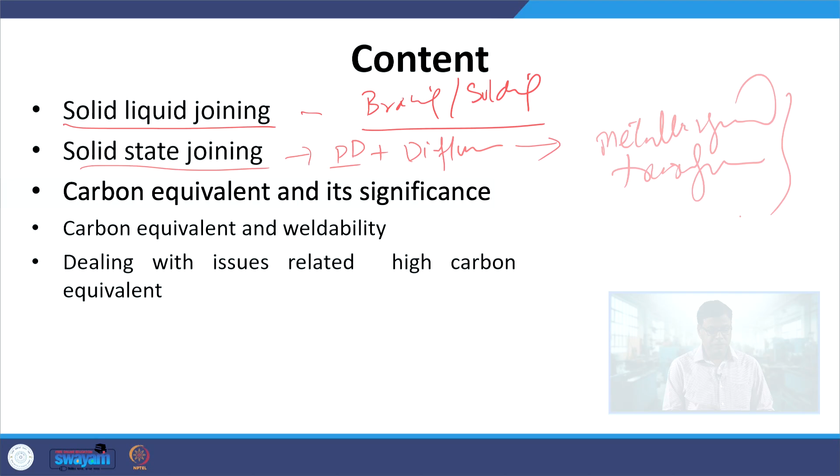In solid state joining process, primarily plastic deformation coupled with diffusion is involved, and that in turn leads to multiple kinds of metallurgical transformations. So we will be talking about the kind of metallurgical transformations which occur in the solid state joining process.

Then the carbon equivalent and its significance - this is particularly true for the welding metallurgy associated with hardenable ferrous metals. Then what are the common issues which are encountered? So, the relationship between carbon equivalent and the ease of welding the ferrous metals.

Since the carbon equivalent is related to the ferrous metals, or transformation hardenable metals like steels, you will try to see the relationship between the carbon equivalent and the weldability of the ferrous metals.

Then what happens when the carbon equivalent is very high? Many issues are encountered and that poses many challenges in development of a good weld joint with reasonably good performance. So how to deal with those issues in case of high carbon equivalent ferrous metals? What are the strategies that are available?

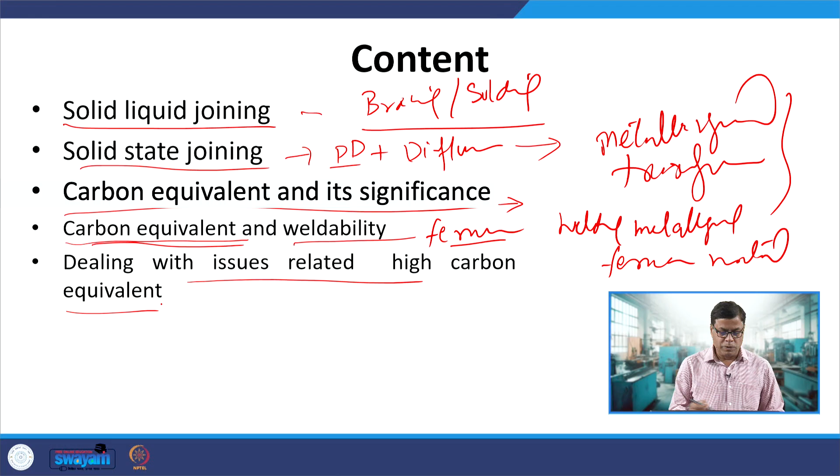Now going ahead with the solid liquid joining process, like brazing and soldering, say parent metal A and B. Initially what we do is the surfaces need to be cleaned and prepared, then heated using a suitable source of heat. This can be induction heating, flame heating, or any other kind of heating.

When things are heated, the metal surfaces interact with atmospheric gases, so they tend to form oxides, nitrides, and also impurities can be there at the surfaces. To take care of these impurities, normally flux is applied at the surface, so that it interacts with the impurities to form slag.

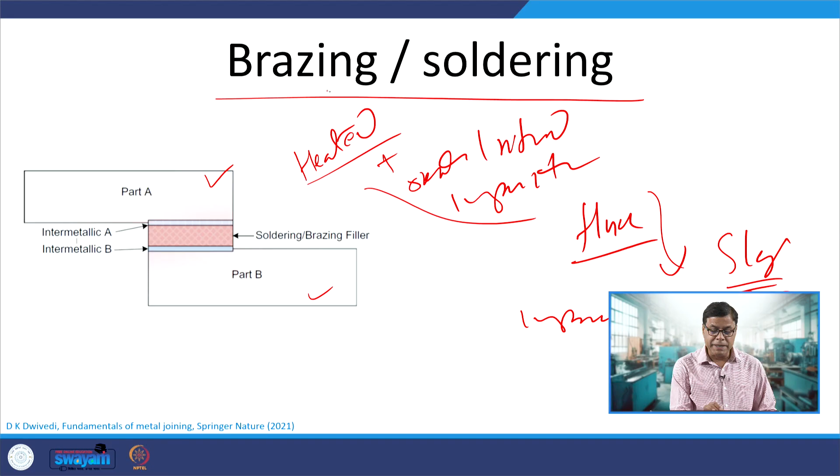Additionally, it improves the fluidity of the molten metal that is obtained by melting the brazing or soldering material. Since the brazing and soldering materials are relatively low melting point materials, when a brazed or soldered joint is developed, we get relatively low strength as compared to the parent metal, because the melting temperature is less. So strength is also lesser than the parent metals.

But if we see, say a brazed joint has been developed - another thing which is important here: this is one substrate of great thickness, and this is another substrate or parent material, and in between we have the molten brazing or soldering material. Heat is extracted very rapidly to the underlying parent metals.

So how do the liquid to solid state phase transformations occur in the brazing or soldering process? It is very simple. Initially we may get some kind of planar structure, and mostly it is the cellular grain structure which is obtained after the solidification in the brazed or soldered layer.

The second aspect is where the molten metal will be interacting with the parent metal A and B. It is possible that if the filler metal used for brazing or soldering purpose is C, then C can interact with A differently from B. There is a possibility that when C interacts with A, it forms one kind of intermetallic compound, and when C interacts with the other parent metal, it forms another kind of intermetallic compound.

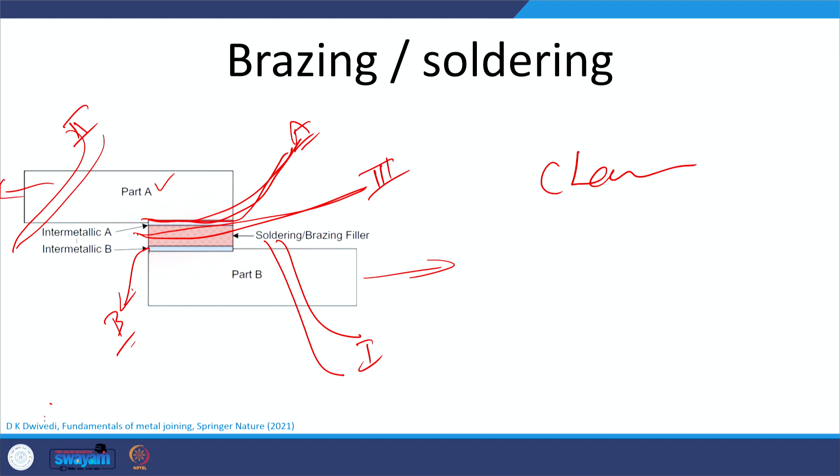So if part B is failing, it means the joint and part A both are stronger. If part A fails, it means part B is strong, but part A is weaker than the joint and part B.

And there is another possibility: if the load is applied and failure occurs from the filler metal itself, then the interface is intact on both sides - parts A and B both are intact, meaning they are stronger, and the filler is weak.

So by changing the filler, it will be possible to increase the joint strength, that is one of the aspects. And this is also possible, like if the failure occurs from the interface intermetallic A, that is the filler and part A interface.

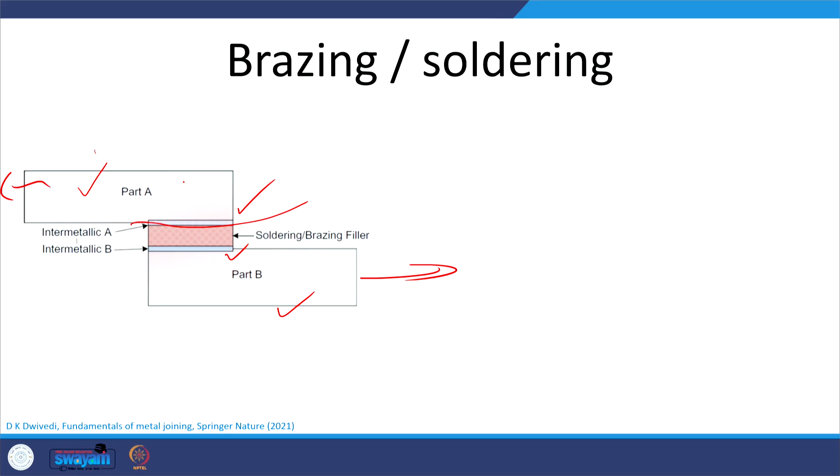If this is failing, it means this intermetallic A is weaker, or intermetallic B is weaker if it fails from the other side. This B is weaker. So that makes the problem a little difficult.

It becomes the case where we have to modify the intermetallic A or modify intermetallic B in such a way that it has more favorable characteristics, and most of the time what we get is hard and brittle intermetallic compounds. So if it is very hard, very brittle, then this will lower the load carrying capacity, lower the ductility of the brazed or soldered joint which is being formed.

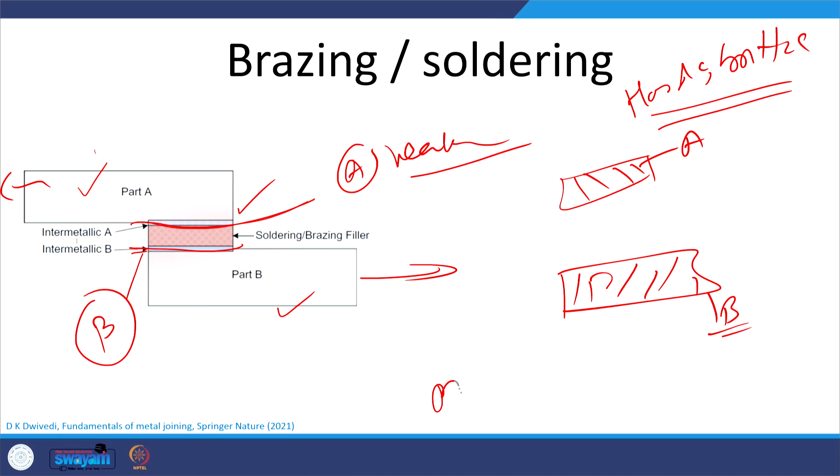So what is done in order to modify the characteristics of the intermetallic being formed on the A side or B side, we can do a lot of things. It includes post heat treatment of the joint, or it also includes modification of the composition of the IMC which is being formed. That can be done by choosing a suitable kind of filler or by incorporating certain alloying elements with the filler, which helps in developing more appropriate kinds of intermetallics wherever the failure is getting triggered.

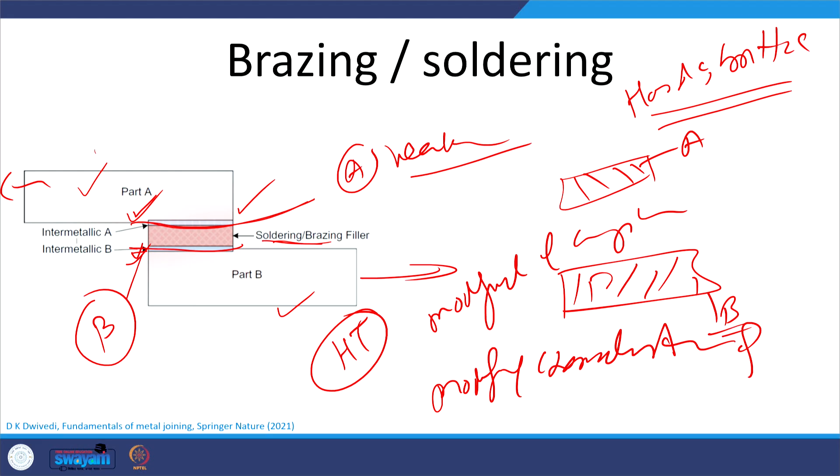Now as far as the solid state joining process is concerned, there are two broad approaches. One is plastic deformation, which can be both micro or macro level, coupled with heat generated causing recrystallization, grain growth, recovery, or deformation assisted phase transformation, apart from grain refinement due to dynamic recrystallization. This is one thing, where deformation coupled with heat causes many changes.

Another one is where just diffusion is involved. So in the diffusion bonding process, primarily at the surface we may have micro level plastic deformation, but mainly the diffusion across the interface is responsible for the development of the joint.

So if we talk of processes like friction welding, friction stir welding, forge welding, ultrasonic welding, explosive welding, or magnetic pulse welding - in these processes certainly plastic deformation is involved coupled with little heat generation. So if the metal is significantly of work hardening type, then the micro level plastic deformation at the surface leads to increased hardness.

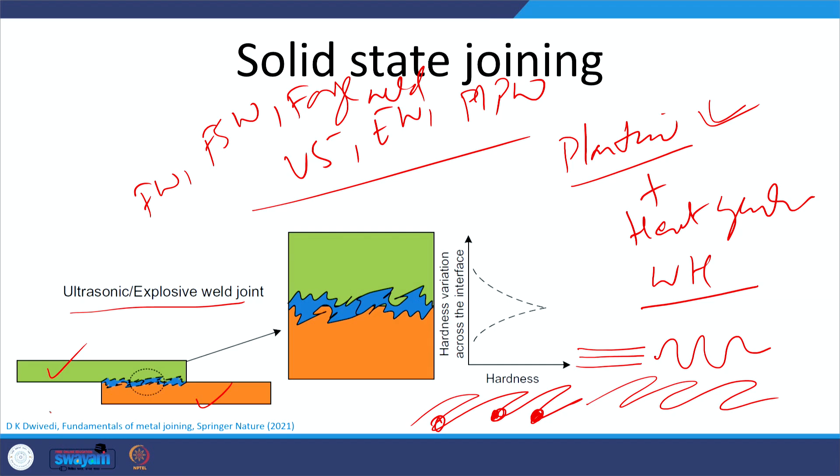But in all these cases what is common is significant plastic deformation at micro level, and when this plastic deformation occurs in the work hardening metal, there is a significant increase in hardness. This can be due to simple strain hardening, grain refinement, or plastic deformation assisted transformation. So multiple factors can be responsible for little higher hardness, because the heat generated during ultrasonic and explosive welding is very limited.

If the metal is primarily of the precipitation hardening kind, then the effects of work hardening, recovery and recrystallization will be very limited. There is no scope for formation of fresh precipitates; rather, due to heat generation, some reversion can take place, which can significantly reduce the interfacial hardness distribution. So this may be true for work hardening metals, and another behavior can be true for precipitation hardening metals.

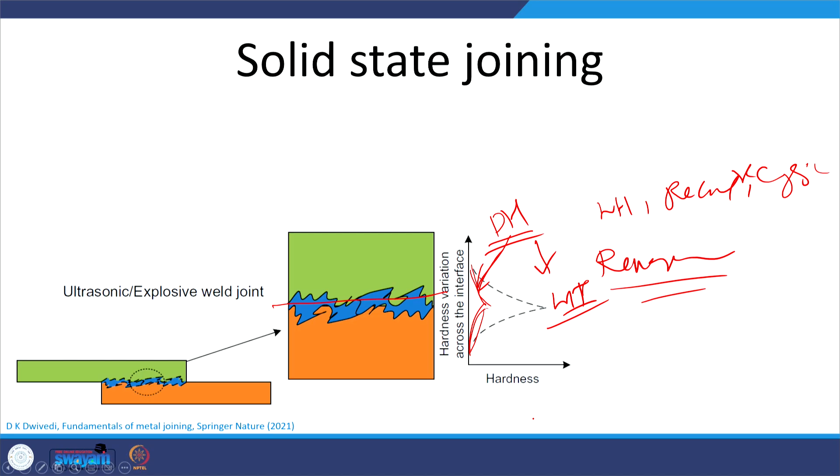Now, if we talk of solid state joining processes where significant plastic deformation is involved, like friction stir welding (FSW) of precipitation hardening metals, these metals are strengthened by the formation of fine precipitates in the matrix.

When plastic deformation is carried out, the metal is severely deformed, coupled with heat generation that is significantly high enough to cause reversion in the weld nugget area. So two things happen: severe plastic deformation coupled with heat generation causes dynamic recrystallization.

This dynamic recrystallization forms new fine recrystallized grains, from which everything as far as precipitates are concerned has been dissolved. Due to the dissolution of precipitates, some elements go into solid solution, providing solid solution strengthening, but since these are precipitation hardening metals, there will be a drop in hardness and strength. That is what we see in the weld nugget, a drop as compared to the base metal.

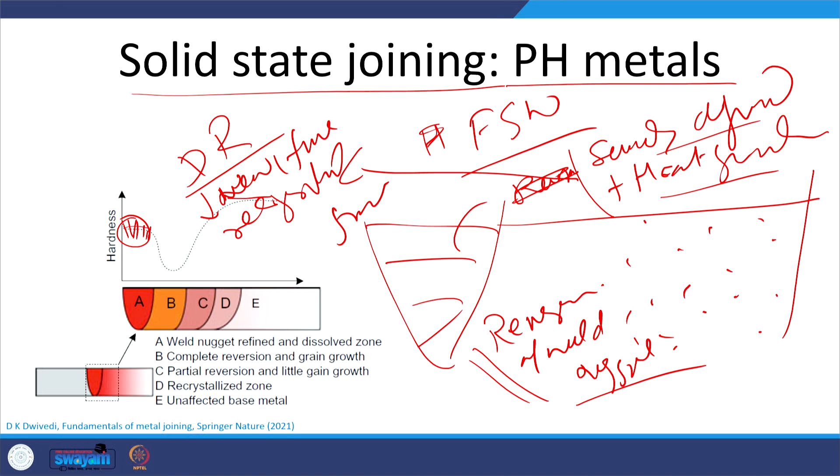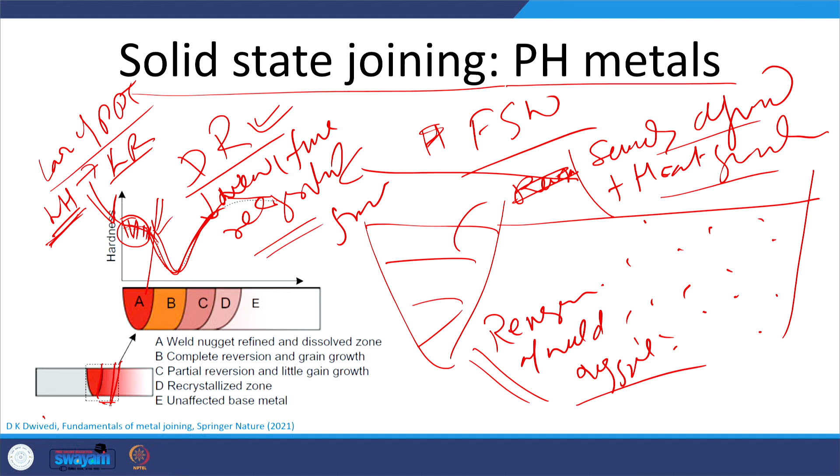At the same time, some work hardening effect can also be observed. But if we look at the zones a little away from the nugget zone, those not falling within the nugget zone itself...

In that area, significantly affected by heat, there is a severe drop in hardness, attributed to complete reversion coupled with grain growth, with no work hardening effect whatsoever. That is why even in precipitation hardening metals we get slightly higher hardness in the nugget due to grain refinement and work hardening, but in the heat-affected zone there is a significant drop due to reversion, complete loss of precipitates coupled with grain growth, and no work hardening effect. That is why the minimum hardness zone is found in the heat-affected zone of precipitation hardening metals subjected to solid state joining processes like friction stir welding.

That is why, in the nugget zone A, the weld nugget is refined due to dynamic recrystallization but is completely free from any kind of precipitate, so an all-dissolved zone is formed. Complete reversion and grain growth take place in zone B, reversion is partial with little grain growth in zone C, and recrystallized grains appear in zone D, with unaffected base metal beyond that.

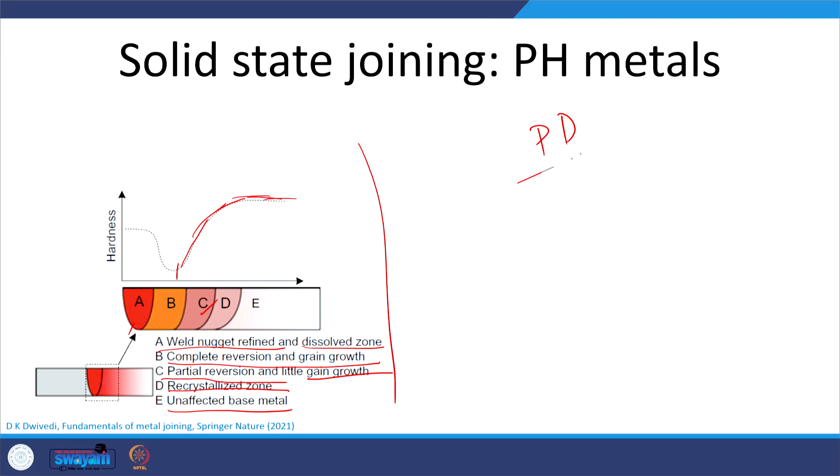So after zone B we see increasing hardness and strength. This is about precipitation hardening metals where significant plastic deformation is involved, coupled with heat generation sufficient to cause recrystallization of the metals.

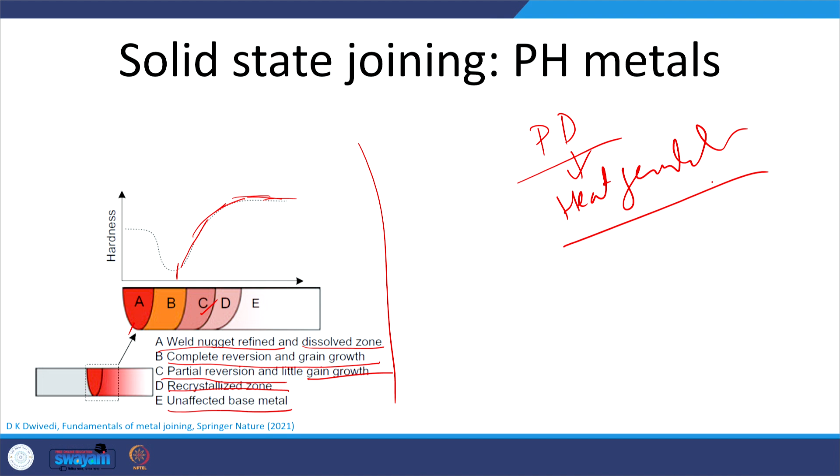If we talk of solid state joining processes associated with work hardening metals, such as ferrous steels, they also show reasonably good work hardening characteristics coupled with transformation hardening. So solid state joining like FSW of ferrous metals causes significant work hardening of the weld nugget area coupled with transformation-assisted hardening, because initially we may have ferrite and pearlite at room temperature, but the weld thermal cycle imposed during welding usually leads to the formation of martensite coupled with some pearlite, and therefore we get significantly higher hardness in the weld nugget area of ferrous metals.

The same is also true for WH metals, since these metals rely heavily on work hardening, and since the weld nugget area is subjected to severe plastic deformation, this zone will show a significant increase in hardness and yield strength. That is why we get significantly higher hardness of the weld nugget area.

Away from that, whatever zone is formed, since work hardening metals are strengthened by development of dislocations, these metals undergo controlled plastic deformation to realize high dislocation density, so that yield strength and hardness can be enhanced.

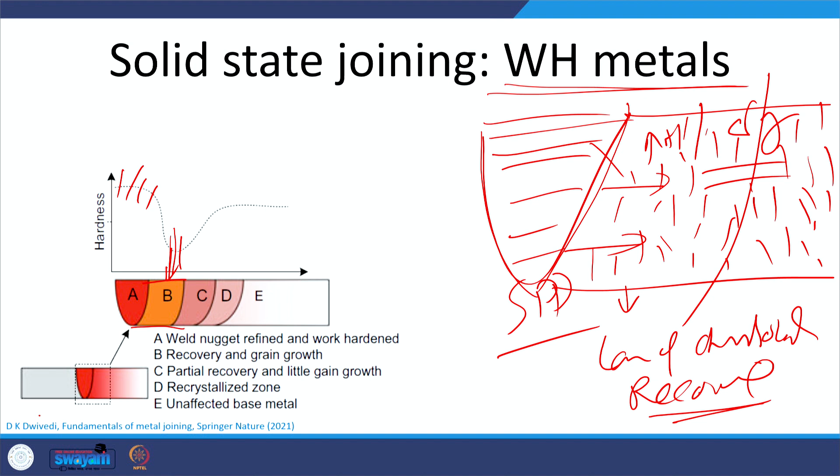The ferrous metals respond very significantly to the solid state joining process, because not just work hardening takes place, but also deformation-assisted phase transformations occur due to the typical weld thermal cycle that is imposed. So if we look at the different zones formed in WH metals...

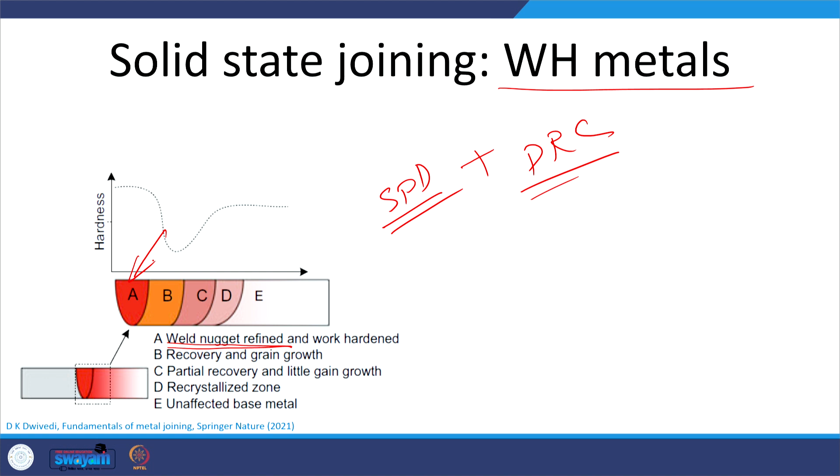Zone A will be subjected to complete refinement of the grain because of the severe plastic deformation experienced, coupled with heat generation that can also cause formation of new grains. So dynamic recrystallization occurs in the weld nugget area, and even in ferrous metals, phase transformation hardening can also occur in this area.

But if we talk of the other areas, the zone next to the weld nugget area will experience recovery and grain growth, and therefore we will get softening of the HAZ in work hardenable metals.

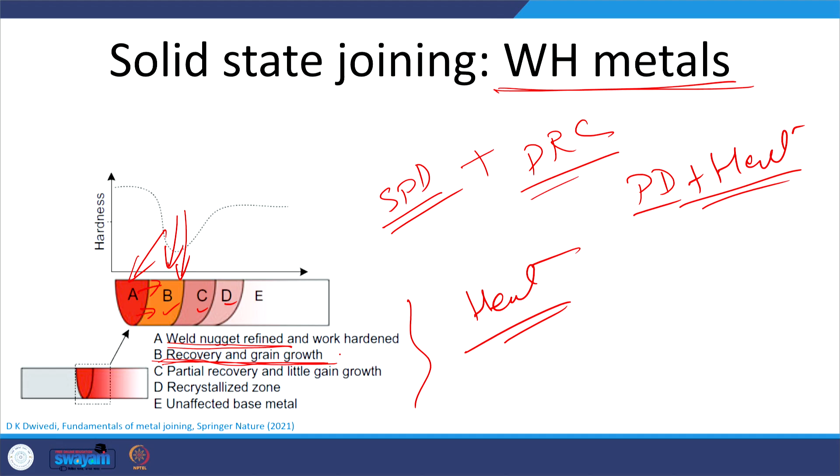Likewise, zones B, C, D are formed primarily due to the heat generated, while zone A is affected by plastic deformation coupled with heat. So other areas like B will be affected significantly by recovery and grain growth, which is why we get HAZ softening.

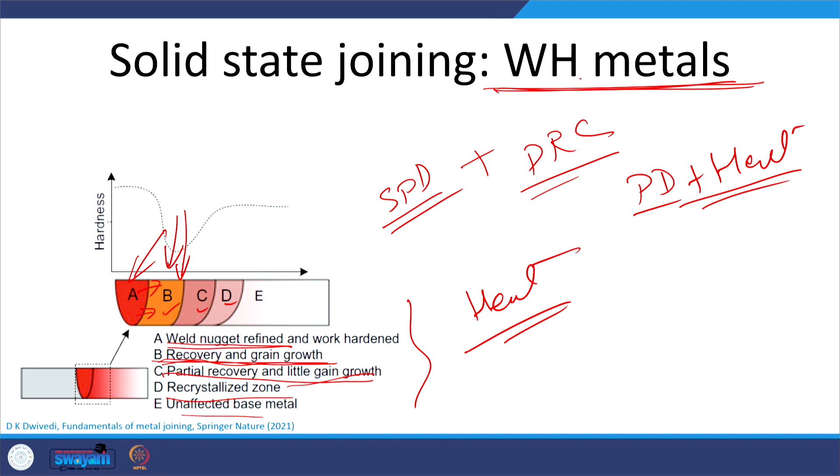That recovery will be partial, a little away from the nugget area, coupled with some grain growth, and then the recrystallization zone and the unaffected base metal. So this is about the phase transformation and metallurgical aspects related to WH metals.

Now, if we talk of the carbon equivalent and weldability - what is carbon equivalent about? Carbon equivalent is a parameter that shows the effect of various alloying elements present in the ferrous metal, having an effect similar to that of carbon.

I will repeat it once again: the carbon equivalent shows the combined effect of all the parameters which have an effect similar to that of carbon. So to calculate the CE, carbon equivalent, we add the carbon weight percentage directly, then Mn (manganese) divided by 6, chromium, molybdenum, vanadium divided by 5, and nickel plus copper divided by 15. Depending upon the alloying elements present in the steel, this equation is used for determining the carbon equivalent of alloy steels.

If the carbon equivalent of the alloy steel is less than 0.4, the transformation hardening tendency will be very less, and therefore the issues related with transformation hardening, like embrittlement and cracking of the weld and HAZ, will be limited. Therefore, if we have a lesser carbon equivalent, the weldability is high. If we have a higher carbon equivalent, the weldability will be less.

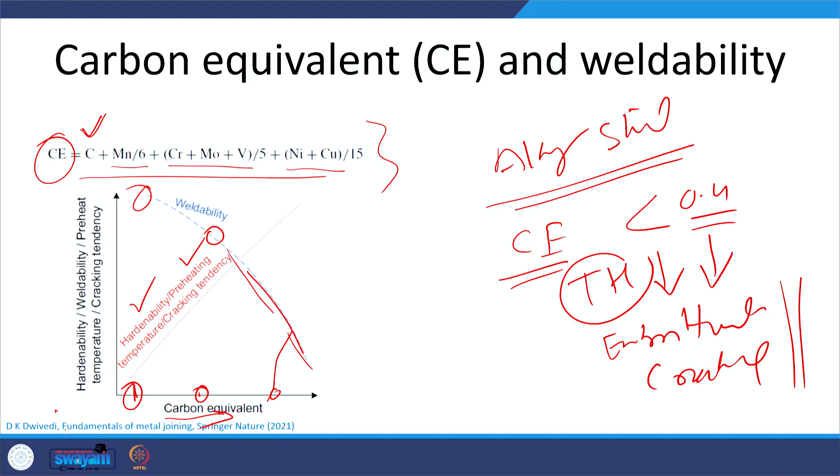So the carbon equivalent is calculated for alloy steels using this equation, and we can see that hardenability, weldability, preheat temperature requirement, and cracking tendency are all affected by the carbon equivalent. Weldability comes down with the increase of carbon equivalent, while other parameters like hardenability, preheating requirement and cracking tendency increase, because it will require greater precautions and more sophisticated procedures for development of a sound weld joint.

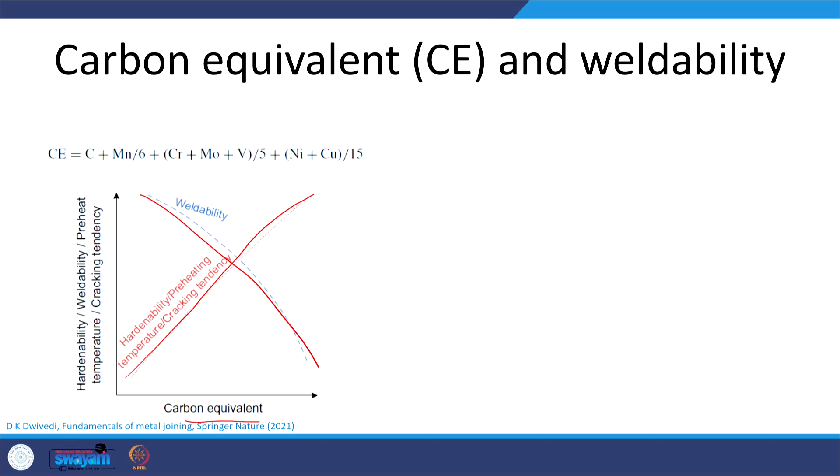If we see the typical thumb rules, if the carbon equivalent for a steel is less than 0.45, then no preheat is required. If the carbon equivalent is in the range of 0.45 to 0.7, then the preheat requirement can be from 200 to 500 degrees centigrade, depending upon the carbon equivalent.

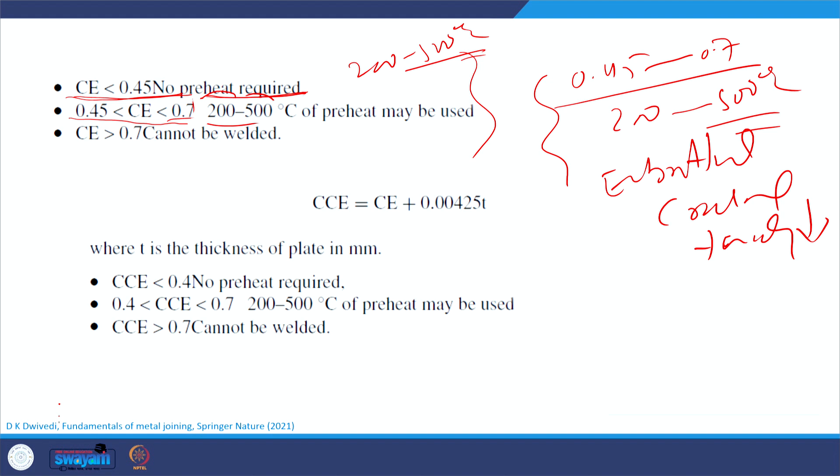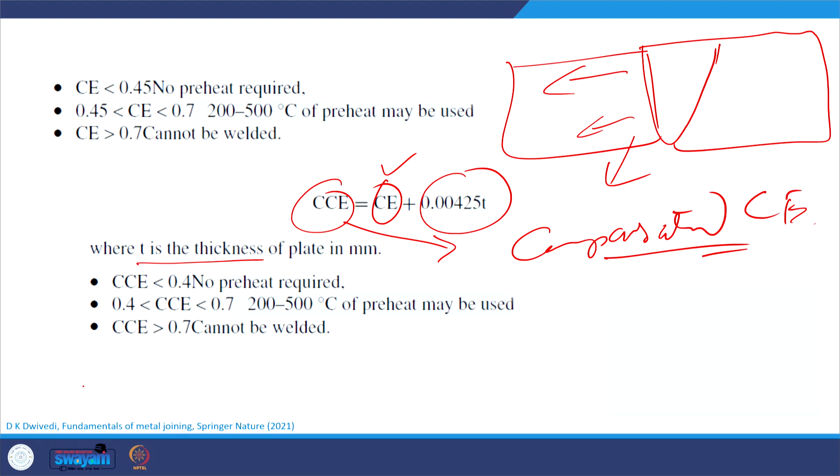Therefore, the thickness factor is also considered along with the carbon equivalent, giving an additional parameter called the compensated carbon equivalent. CCE is calculated using the carbon equivalent plus the thickness factor, 0.00425 T, where T is the thickness of the plate in mm. Empirical equations are then used for deciding the preheat requirements.

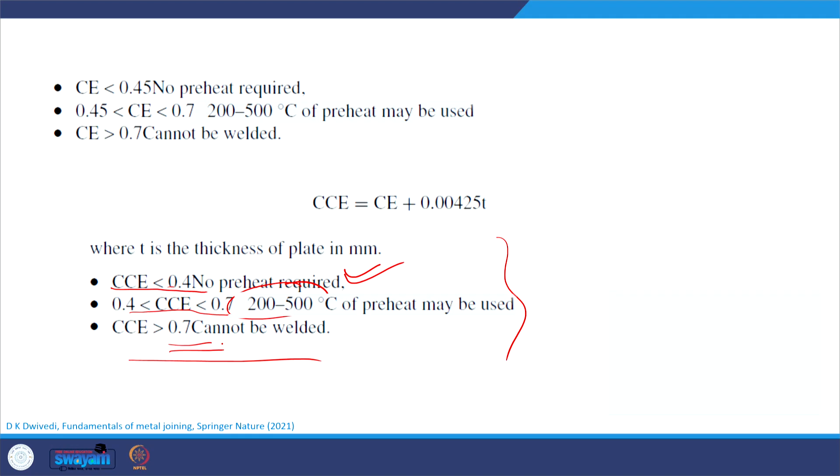If the CCE is less than 0.4, no preheat is required. If the CCE is in the band of 0.4 to 0.7, preheat of 200 to 500 degrees centigrade may be used to avoid embrittlement and cracking tendency. And if the CCE is greater than 0.7, the steel is considered not weldable, or it requires extra precautions for development of the weld.

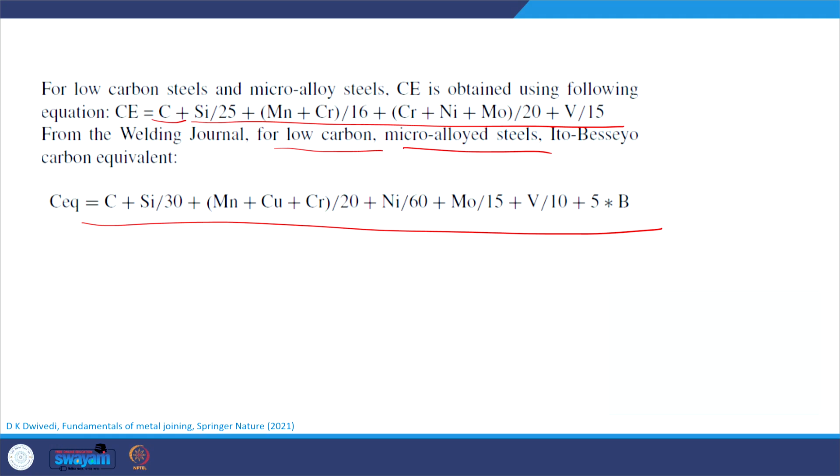For low carbon steels and microalloy steels, CE is obtained using a formula, since multiple equations have been proposed. The carbon equivalent is obtained from this equation, and from the welding journal for low carbon microalloy steels it is given by another equation. So we can calculate the CE and accordingly take a call on what kind of preheat should be given.

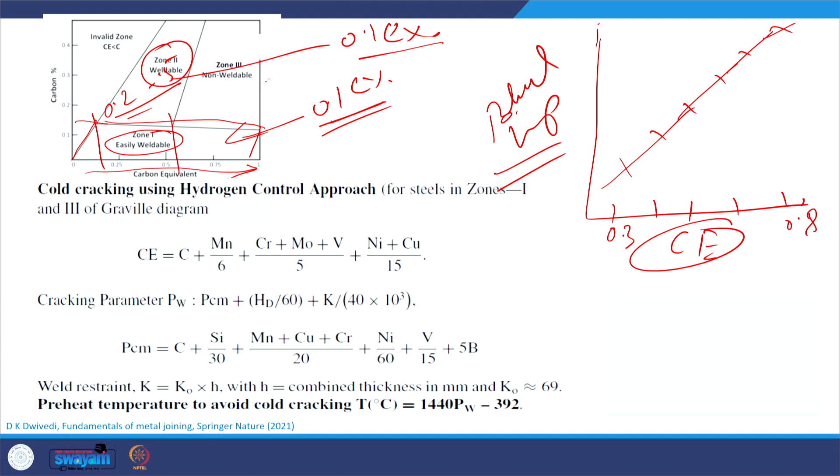Carbon content is greater than say 0.1%, so this is zone 2. In this zone, by using the CE and preheat requirement relationship, we can still develop a good joint. Zone 3 is considered non-weldable, requiring extra precaution to avoid cracking and embrittlement. Here carbon equivalent is greater than 0.5 and carbon is also greater than 0.1, which falls in the case of zone 3.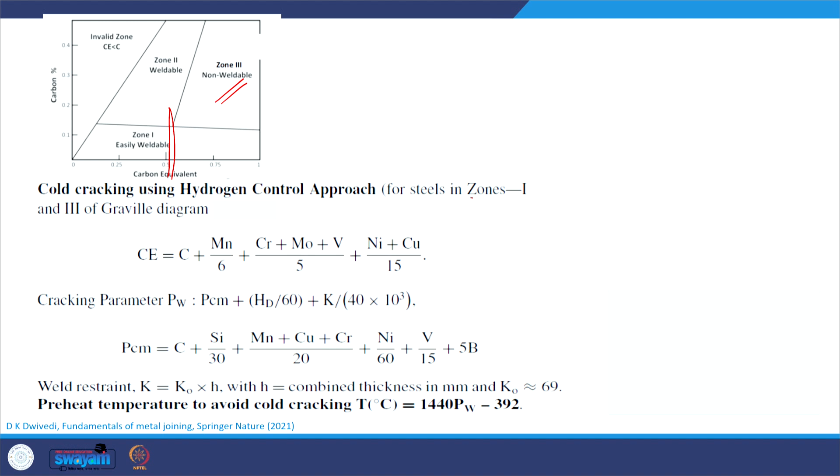So, to avoid cracking and embrittlement tendency, for zone 1 and zone 3, we use the Graville diagram, which classifies the various types of steels based on carbon and carbon equivalent, and how to deal with issues related to steels falling in the different zones.

Using the carbon equivalent calculated from this equation, we get a cracking parameter calculated using this set of equations, giving us PCM. Weld restraint is also considered, where K naught multiplied by H gives K, the combined thickness in mm, and K naught is a coefficient. Using these parameters, PCM and K naught, we can determine the preheat temperature to be used, identifying the kind of preheat temperature needed for avoiding cold cracking.

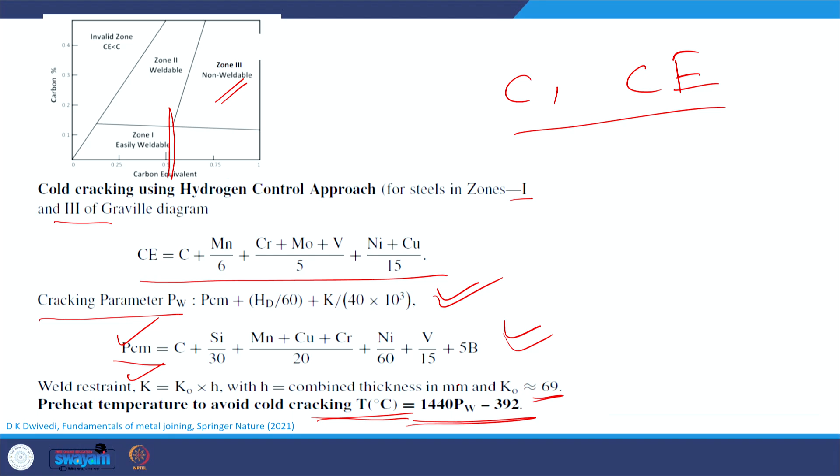Now I will summarize this presentation. In this presentation, I have talked about the various metallurgical transformations that occur during brazing and soldering, solid state joining processes like friction stir welding of precipitation hardened and work hardening metals, and also the effect of carbon equivalent on the ease of welding of ferrous metals. Thank you for your attention.